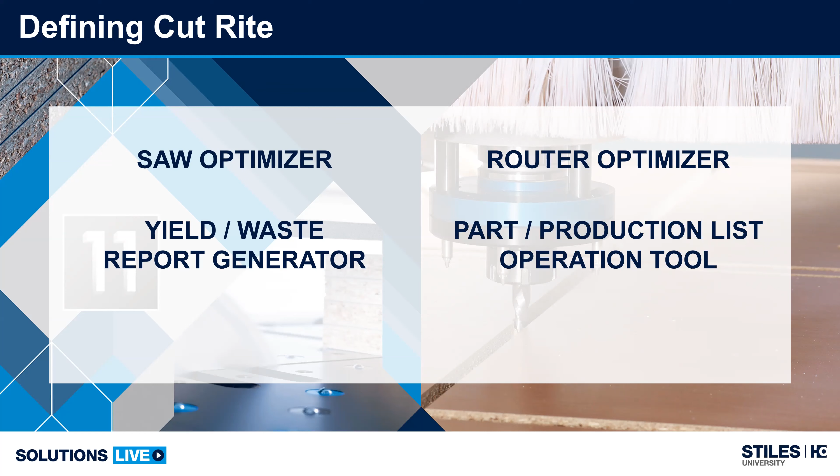We'll create reports, right? We'll tell you how much yield and how much waste, and we'll create reports for both of those. And we'll import your parts and your production list if you have the product module. Then finally, and ultimately, what we want to do with this tool is we're a production management tool, right? So we will grab your materials and we can sort it according to your standards. We can do the same with your parts and so much more. So we want to take you up from wherever you're at and get you to that next level. And hopefully some of the information I'm going to give you today will do that.

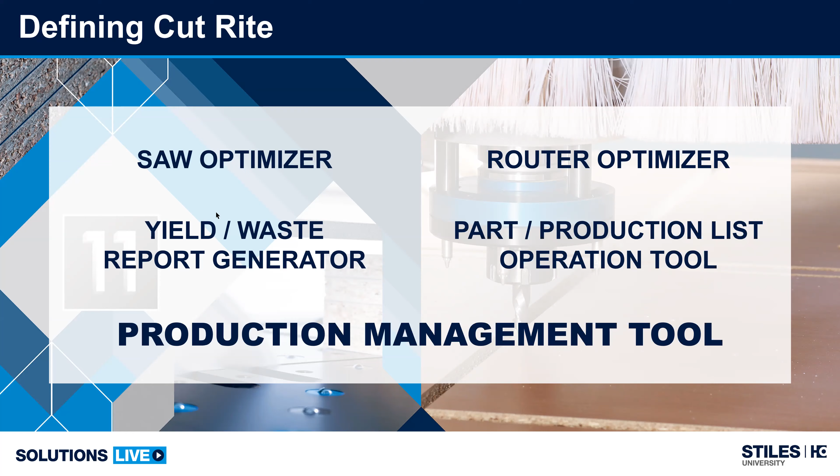There we go. So here's what we're going to do, or at least try to do. We're going to cover some information out of the standard optimizer and its material sequencing. The professional optimizer, and it has material sequencing and part sequencing. And the nesting optimizer, it has material sequencing, part sequencing, and pattern sequencing.

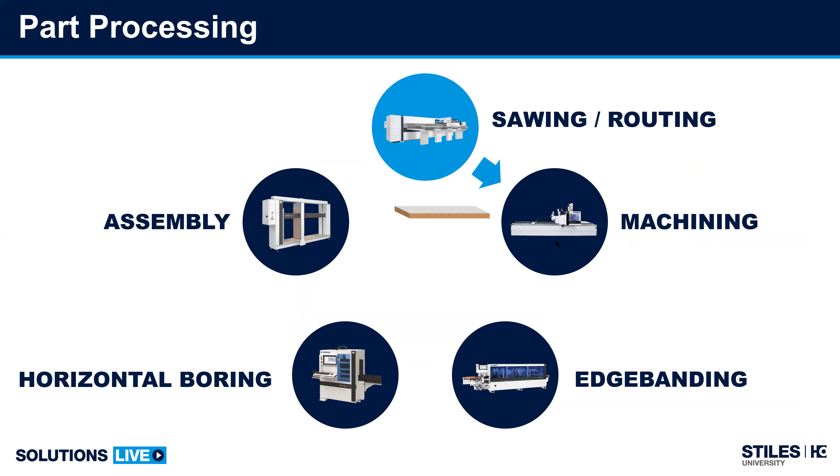So here we go. In an ideal shop, what do we want? We want the parts to flow in some sort of orderly fashion from our saw or our router to the machining center, if you have one, your edge bander, your horizontal boring machine, and assembly. That would be ideal, right? But what happens oftentimes? We get this, right? Everything gets scattered. We get parts everywhere. We get stacks of material everywhere. We end up turning around and having to reprocess stuff because we've lost track of what's going on. Oftentimes it's because we've pushed too much material or too many parts through the saw or through the router.

Many times I've had conversations with shop owners or production managers who've had a pallet of parts stuck in a corner because nobody knew what they were, and they got remade. It was faster to remake than to do that hunt, right? Or the Easter egg hunt, as it's been called. So what we want to do is explore this material and the part sequencing to see if we can't get rid of some of that and get back to that more ideal situation where the parts and the materials flow in some kind of logical sequential order for us and for you.

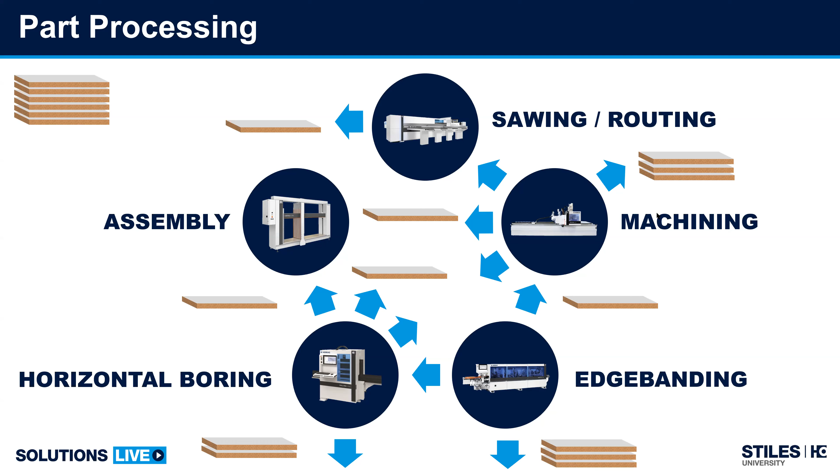So the first thing we'll look at is the material sequencing. And the way we set this up is the same whether you have the standard, the professional, or the nesting optimizers. And if you have Cut Rite open, or if you want to look at it later, take a screenshot of this. This is your system parameters in version 11. Down at the bottom of the boards tab, you've got this board order and automatically created list. We've got that 3 deep ladder logic that you can take advantage of.

If you hit the drop down, you're going to find all the cells from your board library, whether it's your material name, your board code, your cost, your length, width, whatever it is. You can use that to sequence your materials and the order they're going to arrive at your saw or your router. So I've got shops out there that use this in a couple different ways. They might do it just based on the thickness. They want all their thickest materials ran first, or they might want their most expensive materials to go first, or the materials that require the most intensive processing to go through first.

And by intensive processing, I mean parts that are going to go to the machining center, and then the edge bander, and then the horizontal boring machine first, and then materials that don't require quite so much are going to come through second. And the way I set that up isn't so much through the material name, but I use this box here, this information box. And if I trained any of you, you probably heard me at some point say something along the lines of, that information box, it's not used for anything. And for 20 years or more, it probably wasn't. But now we can, just by dropping in like a 01 or a 02 or 03, let that be our sort.

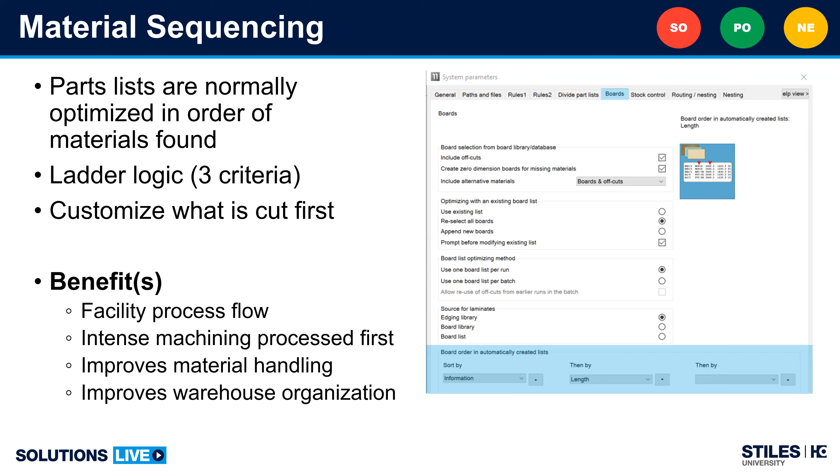One, not only does it help you post saw or post router, you can use that for the material handler as well. So when he gets that list of material and he knows what order it's got to hit that saw, it makes it easy for them to pull an order and put the materials back in order. So when he gets the next order, it's easy enough for him to say, oh, well, every time I'm pulling these first, I can put these back in order. So there's not quite so much disruption in the warehouse as it were.

And finally, what I like is that we can change this order on the fly if we use the information cell in the board library. So if you're looking out the shop and you see that the edge bander is jammed up, or if we see the drawer assembly area is jammed up, and we've got this information set up as our criteria, as our priority, we can change a 01 to a 04 very quickly, or reverse this order, optimize it, send it down, and help take the load off of that area in the shop. Might hurt the material handler guy a little bit, but that's okay, because now we've improved what's happening post saw or post router a little bit.

All right. So if you have any questions on that, please submit them to Andrew, and we'll get to them at the end. But hopefully that's fairly straightforward. This is important. It does not affect your optimization or your yield.

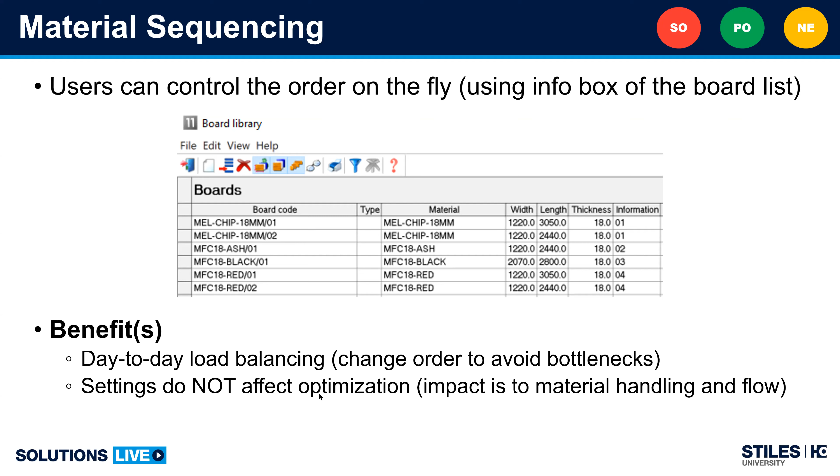Okay. So now we're going to move to part sequencing. For optimizing purposes, you do need the Pro Optimizer, or the nesting, depending on what you're doing. Oops, jumped ahead, sorry about that. In the Pro Optimizer parameters, you need to be looking at the Rules tab, and you'd be down at the bottom at the priority parameter box. If you hit that drop down, what you're going to find is your information box.

So ideally, as they're flowing through the shop, they stay together, and they're hitting assembly at roughly the same time. And you can break that number down as fine as you want and make life a little easier for your guy at the saw, because he's not sorting as much. He's just looking at that priority number and keeping those groups together. It's going through the machining center and the edge bander and the horizontal boring machine together, but it's also hitting assembly together, so they're not breaking apart so many kits and making their life harder, or sorting so many kits.

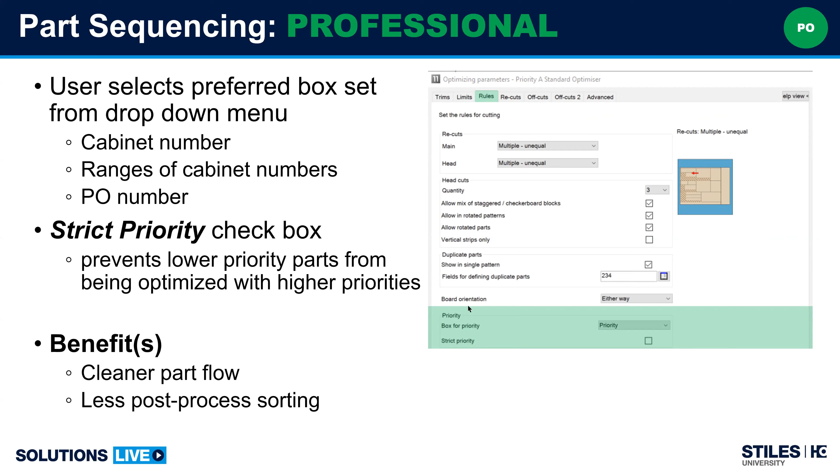I was in a shop last year. They were producing, according to them, about 2,500 cabinets a week at the time, and they were sorting their cabinets no less than 4 times before they hit assembly. We're still working on that to get that process cleaned up, but they were wasting hundreds of man hours a month doing their sorts. It was killing them, and they're getting better. It is definitely a work in progress, but it's something that they saw the benefit to. Their process engineer and I were going through it, and they're getting there. So something to take a look at.

Nesting. So if you're using a router, this can definitely pay off for you.

If you look at your nesting parameters and look on the nesting 3 tab, down towards the bottom, you have your priority again, and this is your priority information box. Again, it comes right out of your information boxes. We've got 4 priorities, 5 if you count none. And I'm going to go through each one of these real quick.

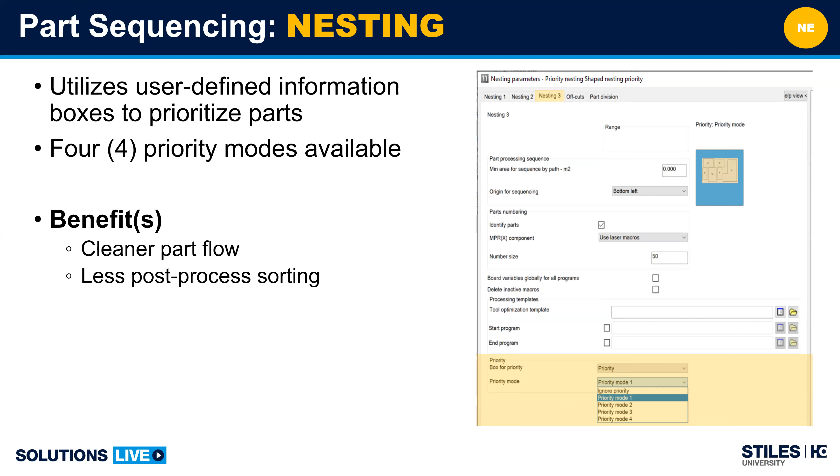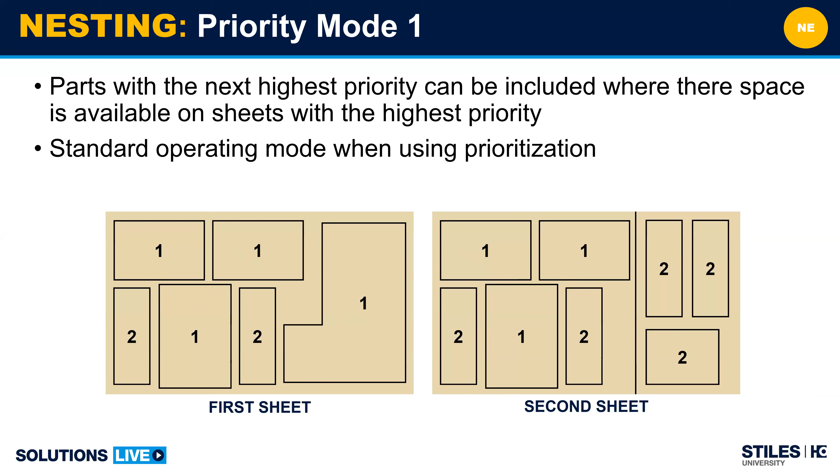The first one here is the one that's really the quickest to work with, because it's kind of the most wide open after a fashion, and the easiest to understand. Your first priority gets cut, and as there's room, we bring in the next priority. We move to the next sheet. First priority, once it's complete, we just start bringing in the next priority again, and then we draw basically an invisible line, and we move on to the second priority. So in the order on the part list.

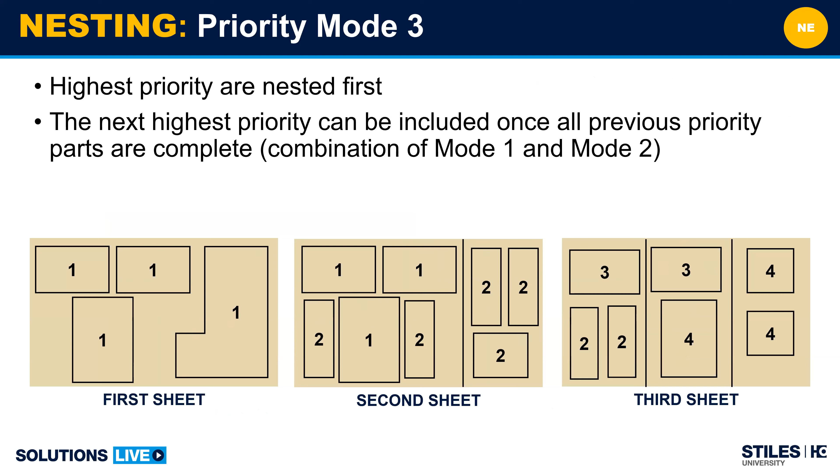Priority 2 is the strict priority. So kind of the version of the professional optimizer, where we set that strict priority on. Priority 1, but we're not going to do any number 2s until all of the 1s are complete. And then we'll move on to number 2s. Priority 3 is a little different in that it looks like the strict priority, but we're not going to introduce the number 2s until the 1s are completed. And then we'll do the 2s. And the same as we're working down into our deeper priorities. The information box priorities. These 1s and 2s are kind of throwing me a little bit today.

Priority 4 is a little bit more flexible. It's kind of a combination of 1 and 3 rather, in that we'll do the 1s and 2s together, right? And we'll move on to 1s and 2s here. But now, even though there's still 2s available here, we're going to start reaching deeper into our priorities, into what's available to make the most of the yield. Because we want to make the yield better for you. We still want to keep that sort for you, make it as easy as possible, help the guys out in the shop, keep those carts limited as much as possible, and just make life easier.

If you're labeling, whether it's off the saw or off the router, we can put that priority number on that label nice and big. So if you're blind like me, that big number is very, very helpful, but it'll make it easier, right? So boom, we got priority 1, priority 2, priority 3, priority 4. When we're out of 1s and all we're doing is 2s and 3s at this point, we know we're done. And we can pass it along, get rid of that cart, and bring in the next empty cart.

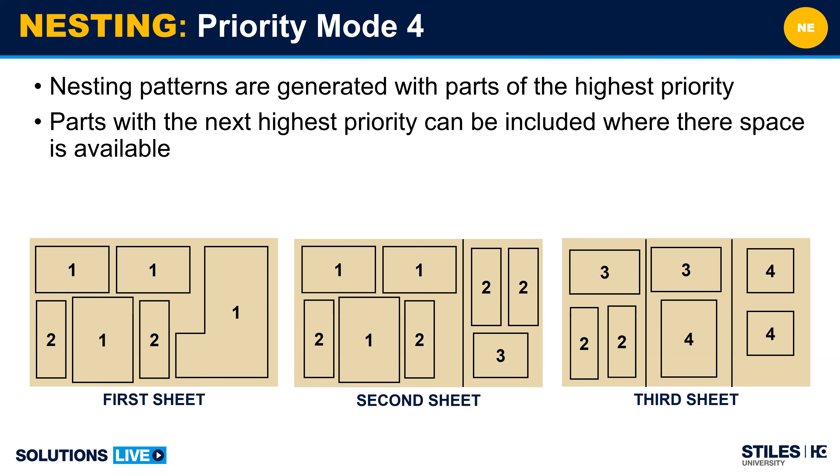I took a very large job in nesting. I made it large on purpose so we can see some disparities here. So I took all 4 priorities plus the none, and I took over 30,000 parts. It'd be nice to have a job this big, but I don't think I'll ever run one this big. With no priority, I ended up just shy of 286 hours, all the way to the strictest priority of 286 hours and 28 minutes. And this is nothing but perimeter routing. There's no machining going on. The difference in boards is only 29. So this took 3474, this took 3503.

Where my time savings is coming in, when I'm looking at this from a production manager or owner's point of view, is that my sort time for my shop is going to be much, much lower. The point on this is, with that large part list priority 2, my first 189 patterns were all priority 1. And there were a total of 9 priorities that we could have picked from in that whole list. In the large part list priority none, the first pattern was 9s, 3s, 4s, and 1s. The second pattern had 1s, 3s, 5s, 7s, and 9s, and so on.

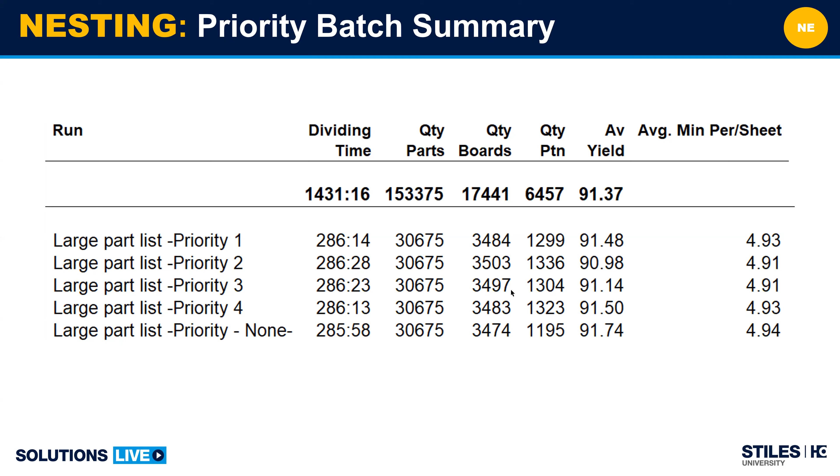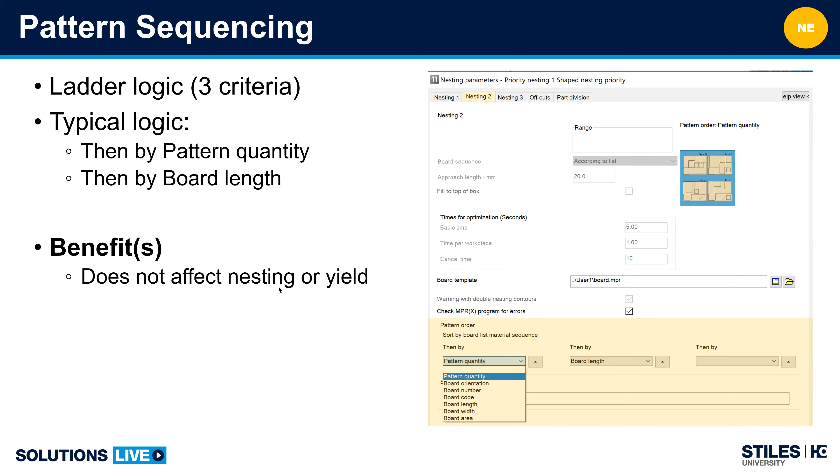Finally, pattern sequencing. Again, in nesting parameters, we have 3 layers of logic. Most of the shops I deal with want to run the highest quantity of pattern first. And then if they do anything else after that, they're looking at board length. They run the shortest boards first and then work their way out to the longest. And that's generally because of the fly cut they have to run to clean up the spoil board. This does not affect your nesting. It does not affect your yield.

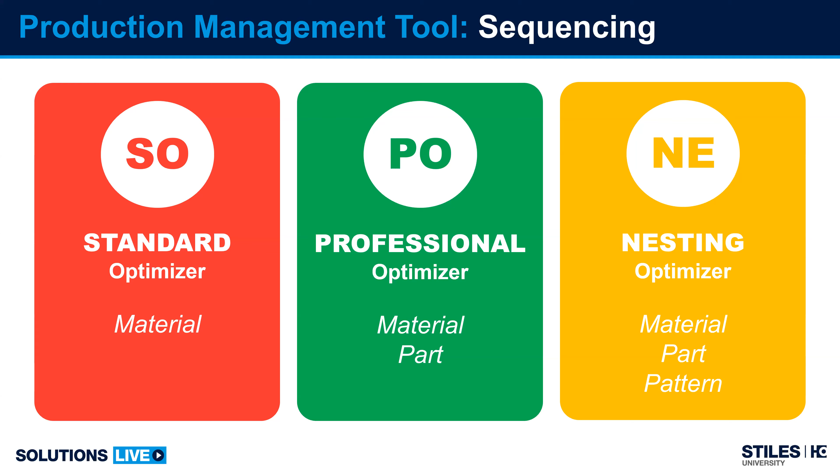So again, this is kind of a recap, and this actually went faster than I thought it would. Standard optimizer can handle your material sequencing. Professional optimizer can handle the material and the part sequencing. Nesting optimizer can do your material, your part, and your pattern sequencing, with the full goal of getting consistent material flow from your warehouse all the way through to your machines.

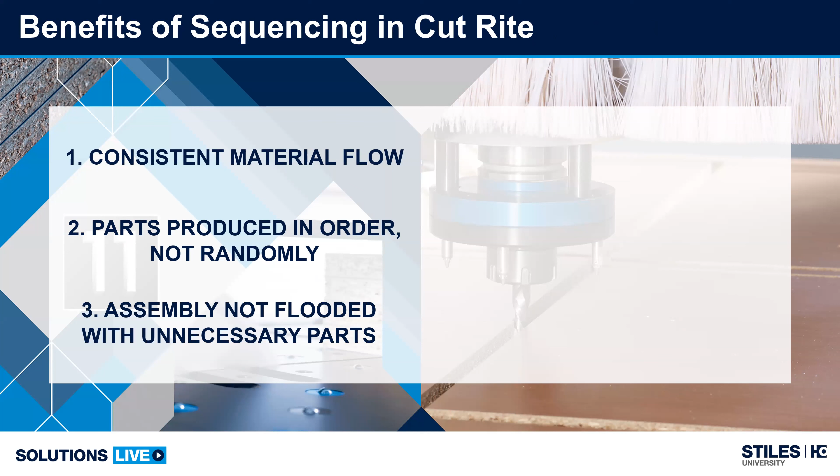Get your parts produced in order, not randomly, right? Not based on whatever the part list has in it and what the material list says. Assembly is not flooded with unnecessary parts. Right? We get the cabinets completed as parts arrive as much as possible. There's a lot we can do to control that.

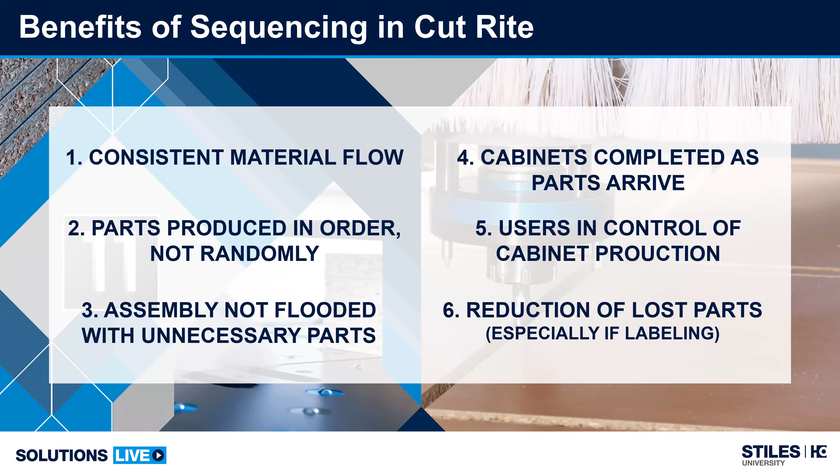Users, so the Cut Rite users are in control of the cabinet production. That's the goal. We want to keep that as tight as possible. And reduce your lost parts, right? And you add labeling into that. If you're not labeling yet, that makes it even better. And that sums it up.

If you have any questions, I would love to hear them, or see them in this case. Hey, Rob, Andrew here. I was just wondering, while you have the floor, while you've got a Cut Rite-interested audience, are there any topics or quick tips that you might have, especially in regards to what you've shared, or some often asked questions that you might want to just address right now?

Well, I do get a lot of questions or people looking for ways to lean out. And when I say lean out, they look for ways to keep cabinets together through the shop. And yes, there are definitely ways we can do that in addition to what we just went through. It's tangential to this, where we break up the part lists and keep the cabinets together that way. So if we want to do a batch of, say, 5 cabinets or 10 cabinets together, we can literally just cut the materials for those cabinets and then move on to the next 5 or 10 cabinets, whatever it is.

So that is really beneficial to a lot of shops, because sometimes, again, we have those bottlenecks. And that's part of the goal with Cut Rite within that production management tool, is to even that flow out within the shop. Right. No, that's excellent.